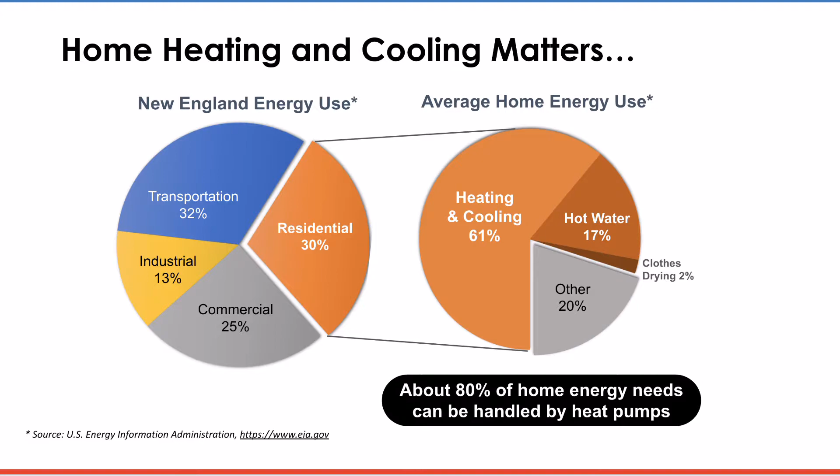So to focus on residential today, taking that slice of the pie and seeing how it slices up, you've got heating and cooling about 61% of residential, and then hot water another 17%. So those are the things that are susceptible to today's heat pump technology. So totaling, almost 80% of your home energy needs could be handled by heat pumps.

So what's the path to decarbonization that we talk about? This is really aimed at single-family homes, and the technology is usually the same for multi-units and industrial, commercial. But step one is weatherize. You want to make sure that the house is as tight as it can be.

Too close to that speaker. I'm the speaker. That's not right here. Can you move this way? Yeah, don't worry about it. On that side? Yeah. I'm a right-handed guy. I know. I'll switch to left-handed. See what happens. How's that, Jim? Out of your way?

Okay, so in the house, first of all, weatherize. That means insulation, primarily in the attic, and air sealing, which is mostly windows and doors, and big cracks if you've got them. You need to do that first, because if your house is leaking or radiating outward, allowing heat to get out, you're going to put in the wrong size heat pump. So you want to have the heat pump sized right for the house, and the first thing to do is to weatherize. Very important.

And you've got examples in your house already. A refrigerator is a heat pump. It takes heat from the colder air inside your refrigerator to the warmer air in your room, pumping it from cold to hot. And dehumidifiers work in a similar way. Air conditioners are actually heat pumps that you just can't reverse to do heating. We'll get into that. So heat pumps can do, as I mentioned, heating and cooling, water heating, and, a little iffy on whether these are worthwhile, but coming up, clothes drying and maybe pool heating.

So the basic math is down here. You put in 1 unit of electricity, you pull 2 units of heat from outside, and you deliver 3 units of heat to the house. So there's your amplification factor. It's called a coefficient of performance. And 3 is not a fixed number. It varies with what kind of unit you have and how cold it is outside and all that.

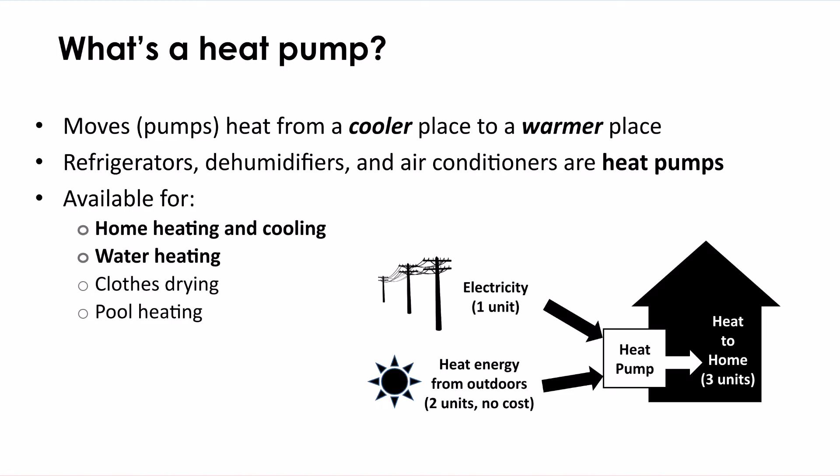So that's the basics, but I wanted to get a little more engineering with you. I couldn't resist doing this. These are the components of what's in that black box. You've got an outdoor coil and an indoor coil, and what you're doing in the heating mode is absorbing heat from the cold outside and delivering that heat to the warmer air inside. And what makes that happen is the compressor that pumps the refrigerant around, with some pressure drops and phase changes that you don't need to know about. But that's what gets the colder outside air delivering heat to the inside warmer air.

And in the summer, you just reverse it. There's a valve there, and then it acts like a regular air conditioner. It takes the warmer inside air and pumps it to the cooler outside air. I think that's right. Yeah, so that cools you in the summer.

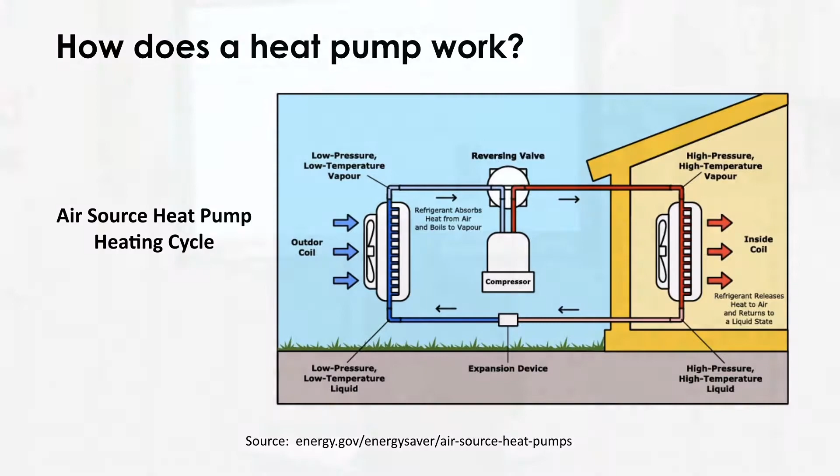Actually, it's even warmer outside. It's cooler inside, and you pump it to hotter outside. Sorry. So what are the benefits for Massachusetts homes? It gives you some year-round comfort because you're not just getting an air conditioner, you're getting a heater. It's all in one deal. You get a substantial reduction in greenhouse gas emissions, and I'll show you some numbers on that.

There's savings in energy, potentially, versus, this is going to change from day to day and month to month and year to year, and Ukraine war to Ukraine war. Things are changing in terms of price on your fuel and price on your electricity. So nothing is going to be a fixed number. These are just kind of relative.

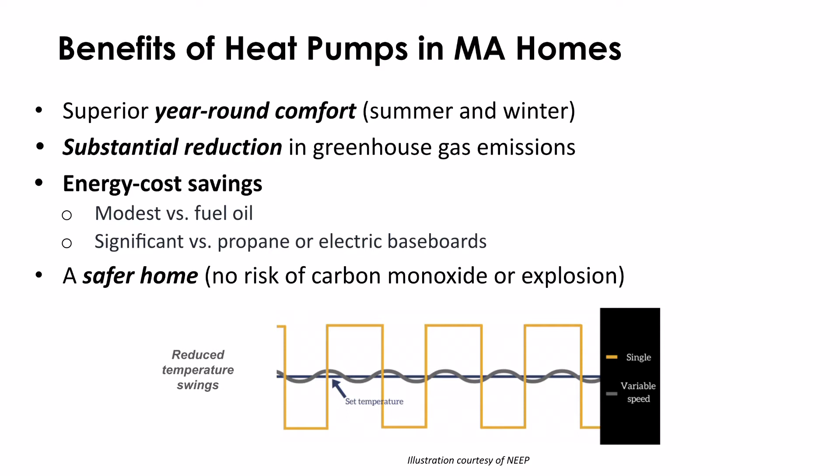But currently it's a modest saving versus fuel oil, and it's significant versus propane or electric baseboards. So if you've got electric baseboards, that price goes up with electricity just the way the heat pump does. So that's going to be always a savings. And also because there's no combustion sources in the house, it could be safer because there's no carbon monoxide and nothing's going to explode. I'll skip the thing on the bottom.

So how much emissions reductions? And this is not going to depend on cost. This is just how many metric tons of greenhouse gas you get from a year's worth of running this thing in a 2,000 square foot typical home. And this is based on the grid emissions, so whatever you get off the grid in Massachusetts for electricity, and assuming some high efficiency equipment.

Ground source heat pumps are pretty low, less than 1 ton per year. Air source heat pumps a little more than 1, and that's compared to natural gas, which is more than 3, baseboard electric about the same, propane almost 4, and fuel oil more than 5. So there's big savings just if you take electricity off the grid. If you get renewable energy, then you can get that down to 0. The heat pumps are then 0 emissions because there's no fuel in the house, there's no fuel making the electricity.

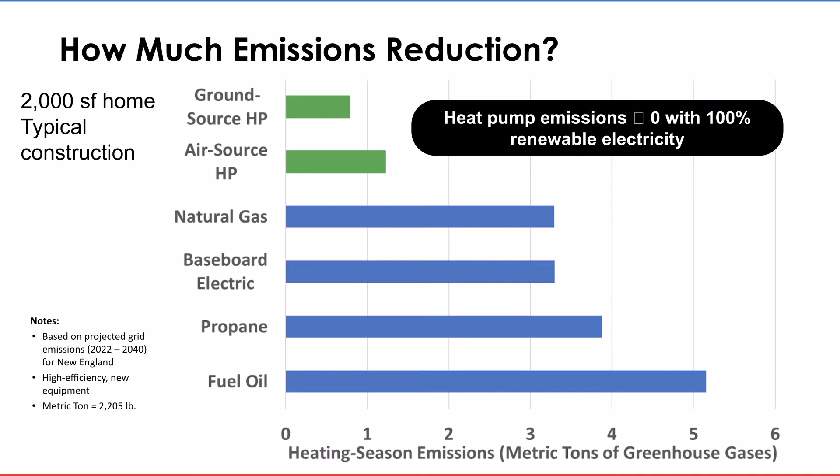So which type of heat pump is right for your home? Every home is unique, so you're going to need some help with this. Not necessarily from me, but there's some folks in the room that can help with this. On the left side, you've got hydronic as the basic type for what you may have now. There's a boiler, and it's delivering heat to either radiators or baseboards, or maybe a radiant heat in the floor. And the other type on the right here is forced air, or forced hot air sometimes called, where you have a furnace, and it's ductwork supplying hot air to rooms and returning cold air back to the unit. Those are the basic types.

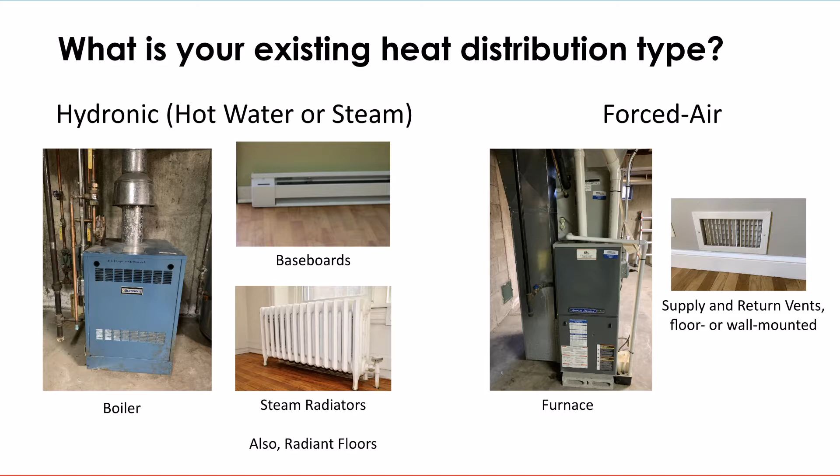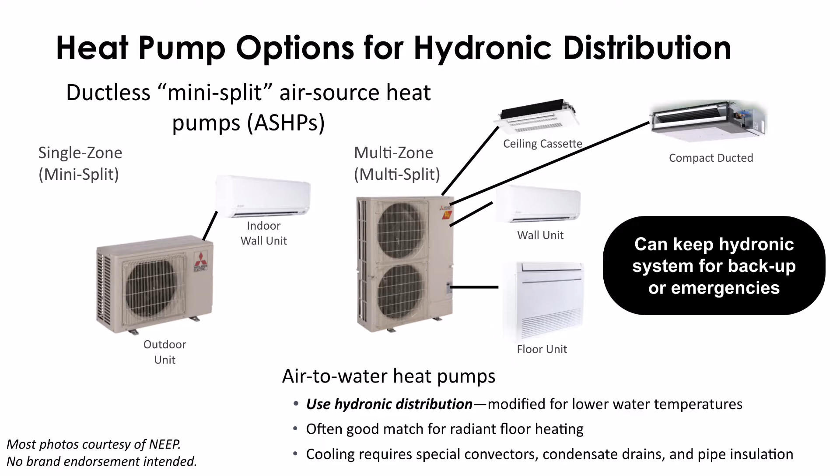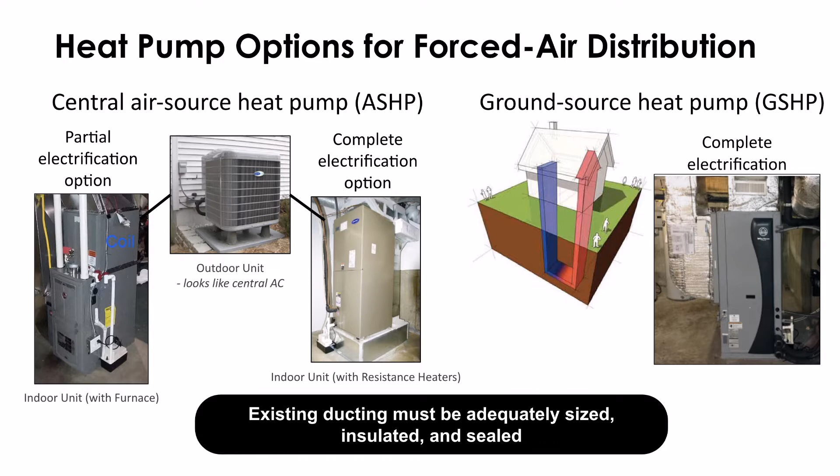Okay, just briefly on ground source versus air source. Ground source, I don't know if this is still true, but there were better incentives. I mean, the government incentives are kind of changing these days. The efficiency is higher because you're taking heat from the ground, which is pretty constant temperature, versus outside where it can get pretty damn cold. So that gives you a higher efficiency and lower energy costs, lower emissions if you're using grid power. And nothing outdoors that looks like a unit, so it might be better aesthetically. And everything's in a package for that heat pump.

On the air source, it's going to be a little cheaper, a little more competitive market. Outdoor space, not that much, just like an air conditioner. It doesn't disturb your landscape too much, and there are some options to do that ductless.

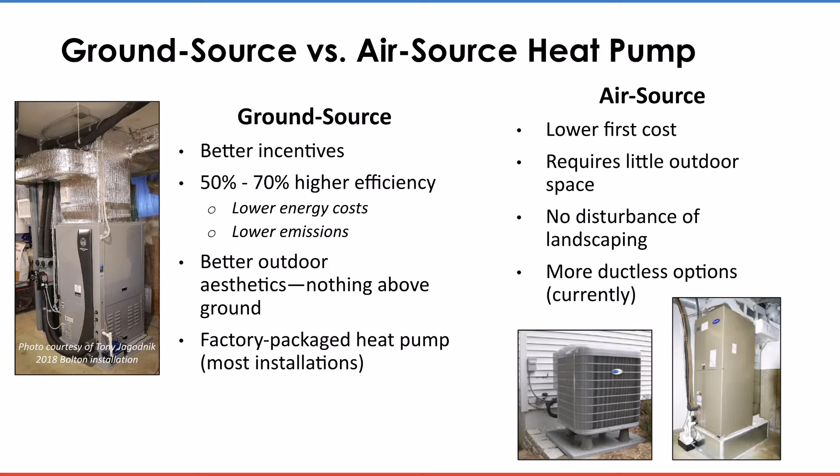So for domestic hot water, this is a little less common these days, but sometimes called a hybrid water heater. You get about 60% savings on energy or carbon emissions. Good, pretty fast payback compared to conventional electric heaters. Compared to a gas-fired hot water, not so much savings, but better for emissions. And if you get the right plumber, they can install this. Not all of them like to do that.

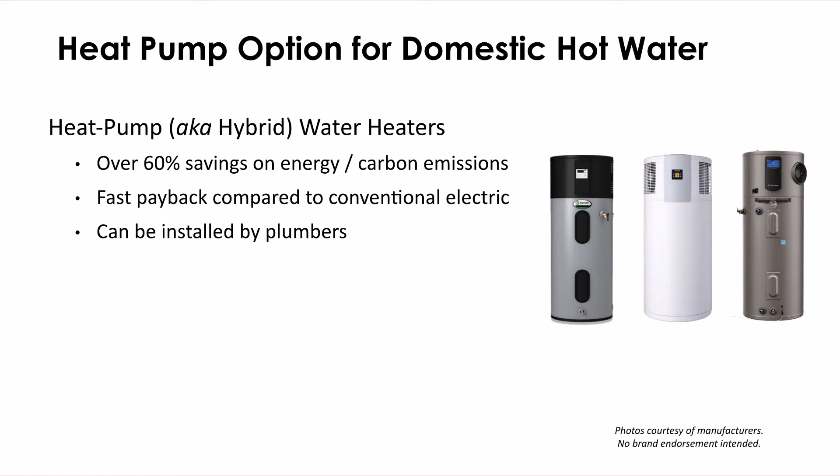So how do the energy costs compare? Now, oops, where am I? I erased the numbers that were off the bottom because these were calculated a while back before things started going a little crazier with costs. But in a relative sense, although your particular situation is going to differ depending on what you're paying for electricity and what kind of fuel you have, ground source heat pumps and natural gas are about the same operating cost, annual cost. Air source is a little higher, fuel oil is a little higher than that, propane is significantly higher, and your baseboard electric, that's really the expensive one.

Now the ones in the baseboard electric can be compared directly with the ground source and the air source heat pump because those costs are all based on electricity, so those go up and down together. But the natural gas and fuel oil and propane, those are going to shift around somewhat independently of the other ones depending on your fuel costs.

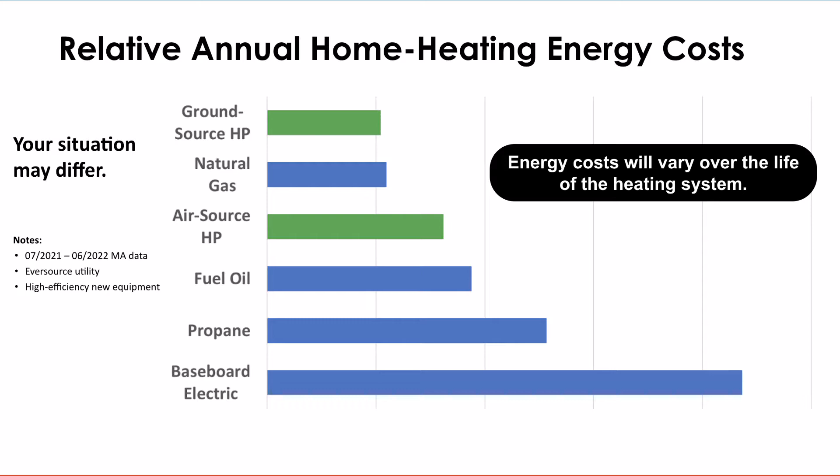So what's your action plan? Plan ahead. If you wait until your furnace craps out, you're going to be a little desperate and you're not going to be able to do something very efficiently, especially if it's a cold day in February. So if your heating equipment is aging, and I don't know what end of life is these days, I hear 25 years, I hear 15 years, your water heater might be 10 years, don't wait till it fails. If you're planning ahead, plan ahead.

You can add AC to a home that doesn't have it in the process of having the heat pump for heat. And certainly if you're planning an addition or a major renovation or a new home, there you've got some lead time to get exactly what you'd like to have for 100% of your heating and cooling.

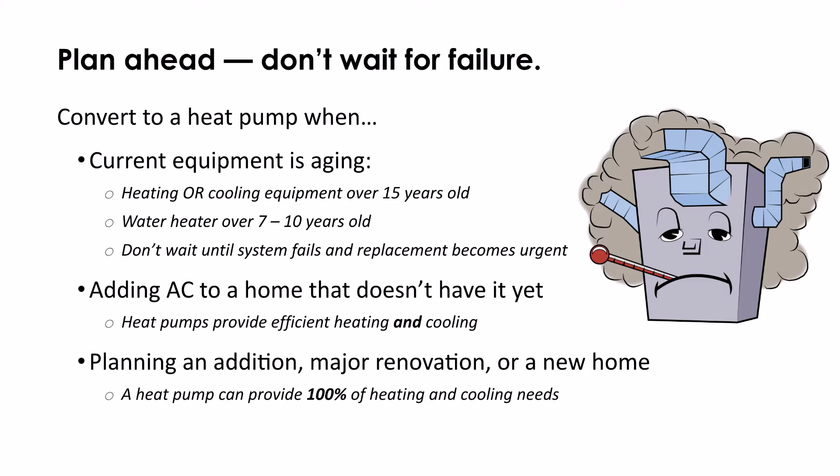So how do you get started? Get some information. I mentioned Susan's in the back there. That's a good source for the heatsmartalliance.org. Get a free home energy assessment, and we got some folks that are very knowledgeable about that, and they'll be up here to answer your questions about that one. Get help from a community heating coach. It's a little difficult now. We don't have a coach on Cape Ann. We'd like to have one. If anybody in the room would like to be volunteering, to be trained, or if you already know it all, let us know. Talk to Susan, we'll get you hooked up to be a local coach.

Then there's a matter of getting quotes, and that's another thing that the local folks can help you with here on getting your first visit. And again, noticing every home is unique, and the installer is going to teach you something. You probably have more than one bid, so you'll learn different things, and they may not agree with each other.

But consider all the factors, not just cost, there's other factors. So I think I'm pretty good on time, so I'll show one more slide here. We're talking about electrify everything, and I just talked about heat pumps. What else can you electrify? We're not going to talk about this so much today, but there's going to be more in this series of electrify everything, as I understand.

So getting that remaining 21% of your residential energy use. There's cooktops, like induction. There's lighting, which is, I hope, already LED, so there's not much you can do with that. And there's all kind of vehicles you can electrify. Motorcycles, cars, trucks, buses, even trains. They're talking about the commuter train being electrified. Boats, that's going to be a little harder sell, but you can electrify boats, it's been done.